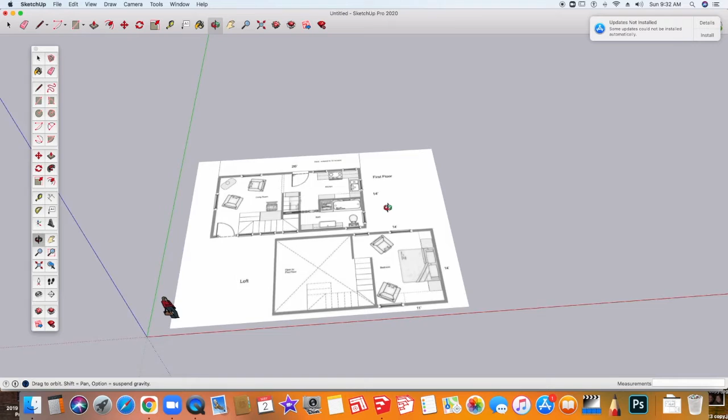Even if it doesn't match perfectly, it's okay, because when we create our volume study, which we'll be drawing our floor plan from, you'll be using the pencil tool and actually typing in the dimensions. We're going to do that first.

I can take the pencil tool and zoom in here to where this wall would extend to. Remember you want it to snap to the red or green axis. As I'm pulling it, I can click to where I think it would end, and then type in 26 feet. It looks like that is pretty correct.

Then I can come across here and type in 14 feet, and across the other side here. Remember, if you need to move something, to get the pan tool you can click down on the mouse and hold the shift key, or you can even use the H key.

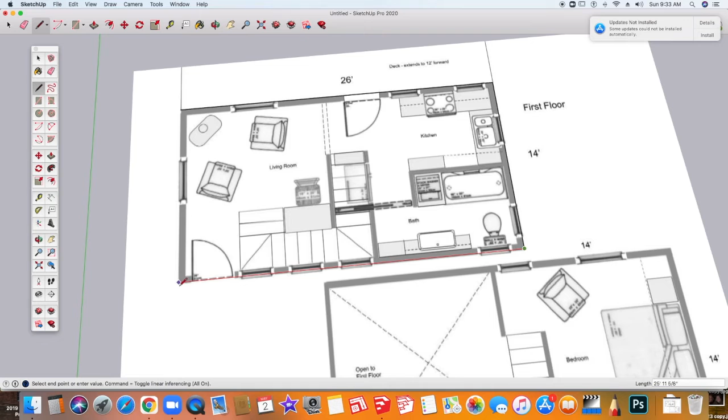Now this one I can use inferencing for, because I can mouse up to there and I should see a dotted line. I can also see down here in the lower right hand box that it says 26 feet, so I know that when I draw up to there, it will connect it. You can see there's a little bit of windows showing and whatnot, but actually this is the correct size. This is the first floor.

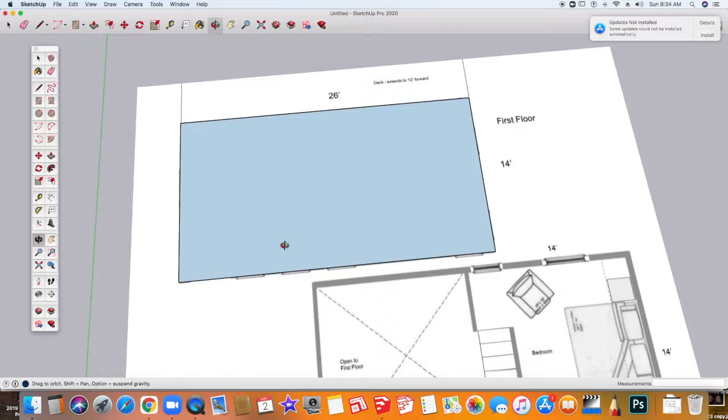When I brought the floor plan in, it was its own group. I'd like to assign this to its own layer, and here is the actual floor plan. I do want these to be separate because at some point I'm going to want to turn off this floor plan. I'm going to select the floor plan and go up to Window.

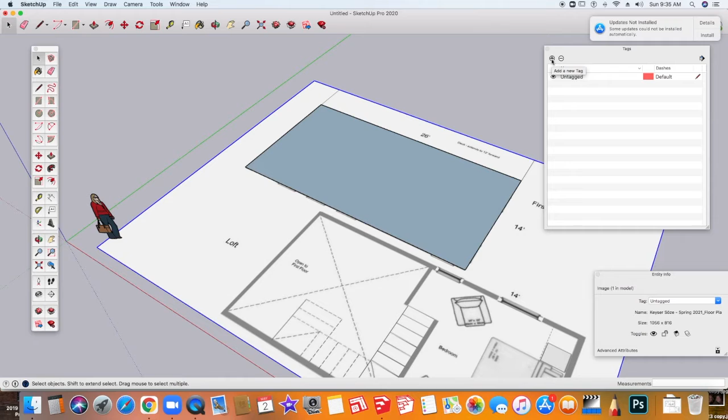I'm going to select Entity Info Box, which is right here on the lower right, and select the tags layer. In SketchUp Pro, the way you apply tags to an object is slightly different than how we did it in SketchUp for Schools. In the plus button here, just like in SketchUp for Schools, I'm going to click it and call this floor plan.

Planning ahead, I'm going to make another one for first floor. I'm going to call this volume study, just so I know it's different from when I actually create the first floor plan. Because I have a second floor, I'm going to do the same thing for the second floor volume.

You'll see that the floor plan is selected. So when I go to the entity info box, when I click on different things in SketchUp, you'll see that the entity info box is actually giving us information about what that object is.

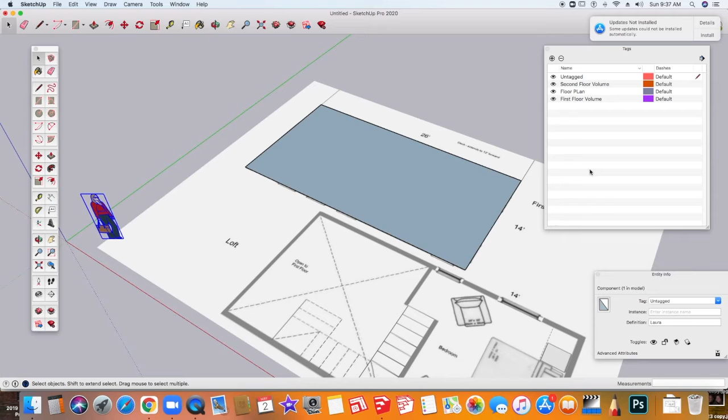When you draw anything in SketchUp and you haven't applied it to a tag, it's always going to be in the untagged tag. What we want to do is apply that object, when we select it, to a tag that we've created.

So when I select it, it's going to highlight it. You can see it actually has a name because when I imported it, it was a file, so the name of the file shows up here. Now I'm going to select floor plan. When I do that, it will automatically put it on this tag and tag it with the floor plan.

You can have multiple things on individual tags. When I turn this off, and I can turn it on—the advantage of tags is that you can turn on and off different parts of your model, and that may become important when you're working on it.

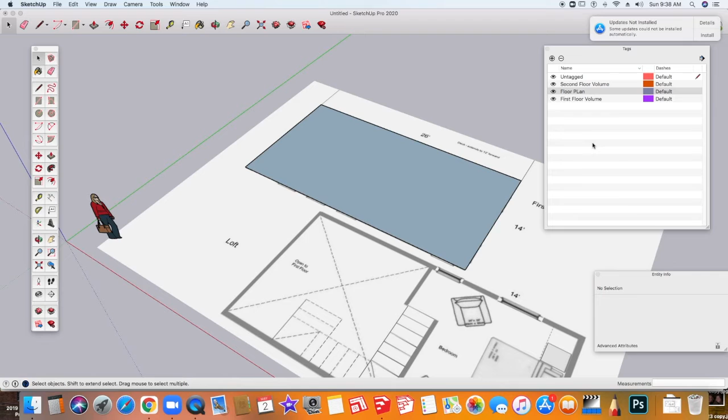Now I have this shape that I drew, and I'm going to triple click it and group this. The reason I'm grouping it now is so I don't forget, because as I draw things, remember that grouping makes it so that when you draw on top of something, it's not going to stick to it. That's really important when you're working in SketchUp. I grouped it, and now I'm going to tag it and use first floor volume study.

You'll see here, if I click the eyeball on and off, it will disappear. Right now I'm just doing volume study. And I also know that my second floor is roughly the same with the exception of what this part is going to look like.

There are a couple ways I could handle this, but I'm going to just keep the same footprint because this floor is open to the first floor. That means these outer walls will actually be at the same height, or they might be different. I haven't really determined that yet. Depends on what the roof looks like. They may be different, but for right now, I think it's going to all be the same height.

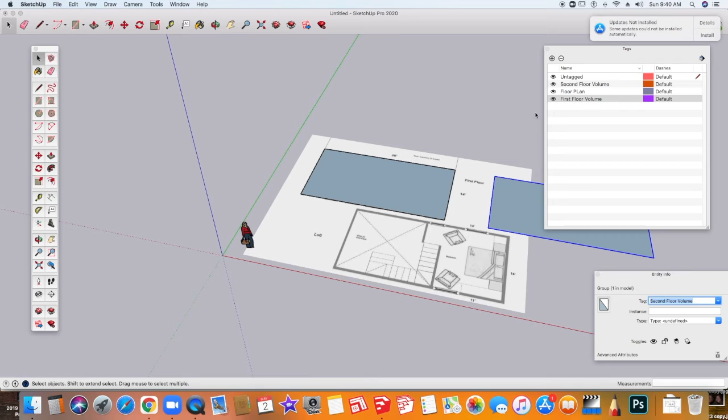So in that case, I'm going to actually make a copy of this. To do that, I'm going to select it, use the Move tool, hold the Option key down, and make a copy. Now they're both on the first floor volume study. So I need to take the one I just pulled and apply that to the second floor volume study, and let's just figure out and see if that works. Yep, it works. Now I have these two and I can move them separately.

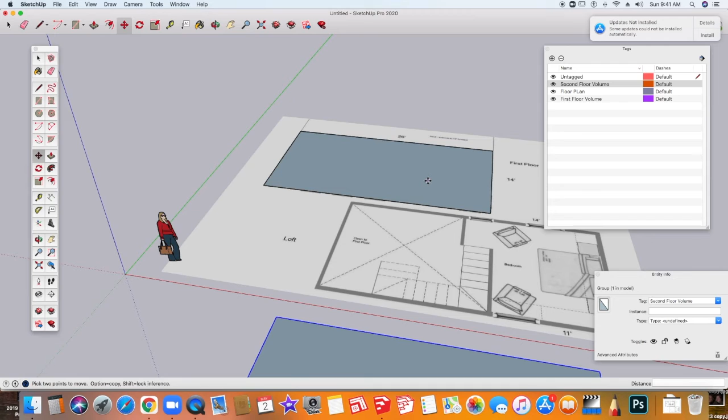So now for the volume study, our parameters are that this house is sitting on a pad that is 1 foot thick. The foundation will always come up above grade, which means the ground level. If you have a sloping property, it might come up higher, just depends on what your site is like. So for right now, we're just going to create this as a 1 foot high pad.

To do that, obviously I'm going to have to click on this. Because it's grouped, I have to do this in edit mode, so I'm going to double click and get into edit mode. I'm going to take my push-pull tool and push that up 1 foot.

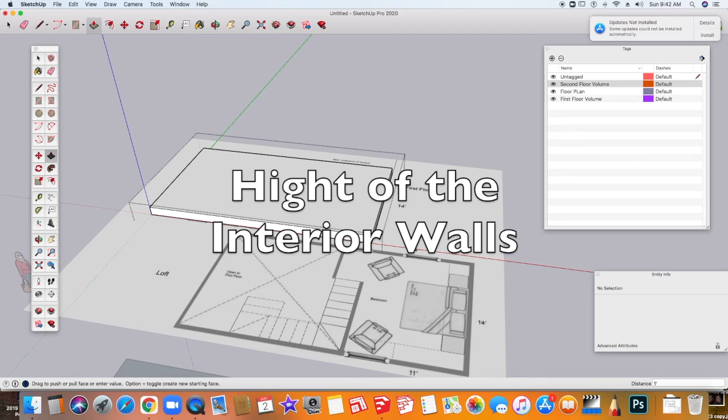Now we have to think about how high our walls are. In my case, my walls are 8 feet high. Some of you may have done 9, but I'm going to do 8. So I'm going to click again and pull this up 8 feet. Right here, this is my first floor.

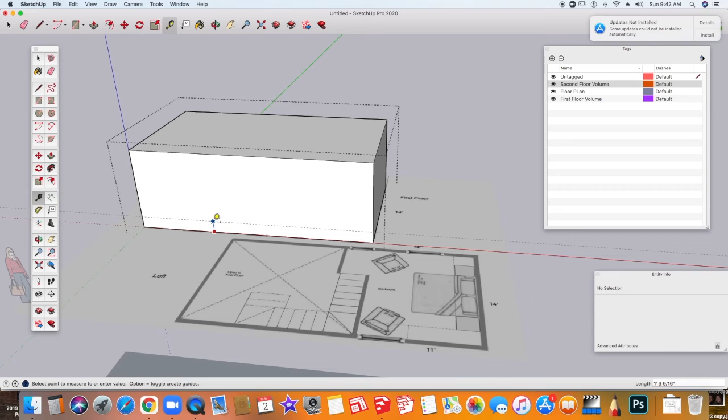I'm going to go into edit mode and pull a little guideline up 1 foot along the blue axis, just so I remember where my pad is. If you have a second floor, there will also be a 1 foot space underneath, which will account for your floor joists. These are the joists that support the second floor. So we're going to do the same thing here.

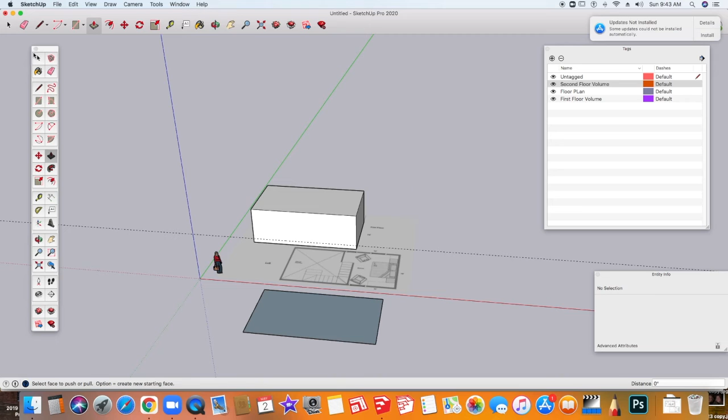I'm going to go into edit mode. Remember, if you see that you can't do anything, it's because you're not in edit mode. I'm going to pull this up 1 foot, then pull this up another 8 feet because that would be the full height. So now I've got these two pieces.

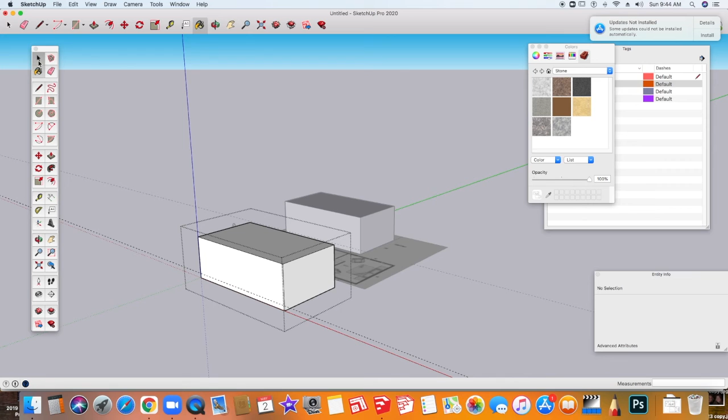I'm also going to go into edit mode here and give myself a 1 foot high notation for where that floor joist would be. I did it in edit mode so that this guideline would actually be stuck with this group. So now I'm just going to put them on top of each other.

I'm going to select it, use the Move tool. Remember that when you move with the Move tool, you always want to go from a corner to a corner. It just makes things a whole lot easier.

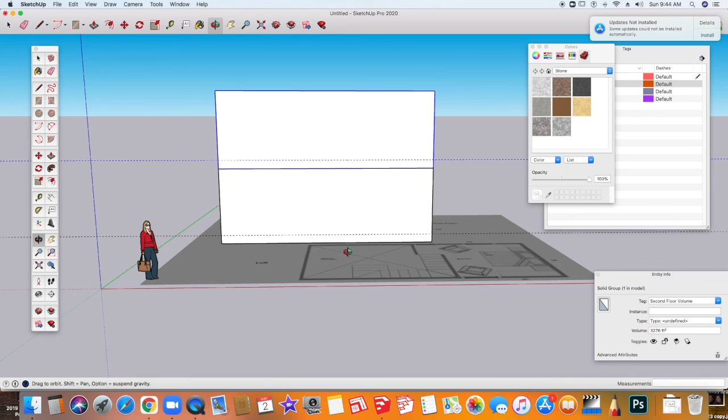So here we have our pad. Then we have our first floor with an 8 foot ceiling. Then we have our floor joists, and we're allowing 1 foot for that. And then I have another 8 feet above that. Now you can see how large this actually is in relation to the person.

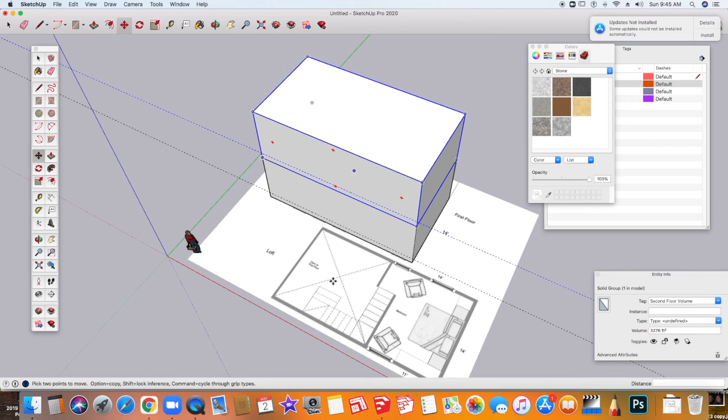Because we're going to be thinking about our roofs at the same time, I'm also going to mark where my walls will be in this volume study for the second floor. So I'm going to go into edit mode, double click that second floor volume. And I know from here to this is going to be a half wall. This is 14 feet, this is 14 feet. And then this side, because I'm accounting for this 3-foot stairwell, this will be 11 feet.

So I'm just going to put a guideline in here to remind myself of that. Guidelines are very helpful. They don't affect geometry like a line tool would affect the geometry. Guidelines are used to kind of lay out what it is you want to do.

Here, I'm going to put in 11 feet and click enter. Then I'm going to pull another guideline and type in 14 feet. If I wanted to do a sloping roof here, I would know where my wall would need to be going down from, or if I wanted to pull this up a little bit higher and make a cross roof, I could do that too, or a gabled roof.

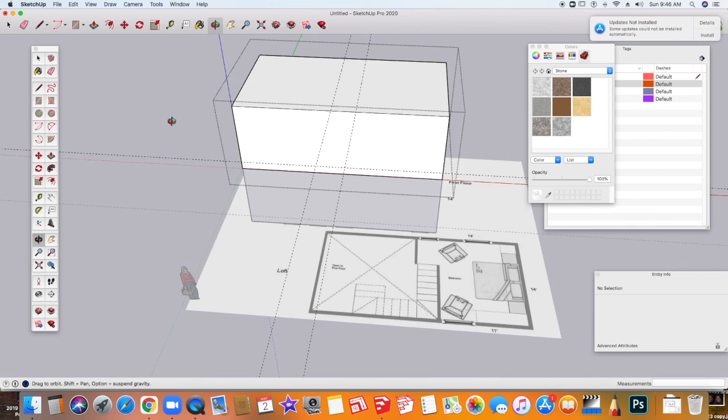So now I'm going to close that and I'll be able to come over here and turn off the second floor volume, and I can also turn off the first floor volume, and turn off the floor plan. Remember to save your work and remember where you are saving it to. I'm going to save this on my desktop.

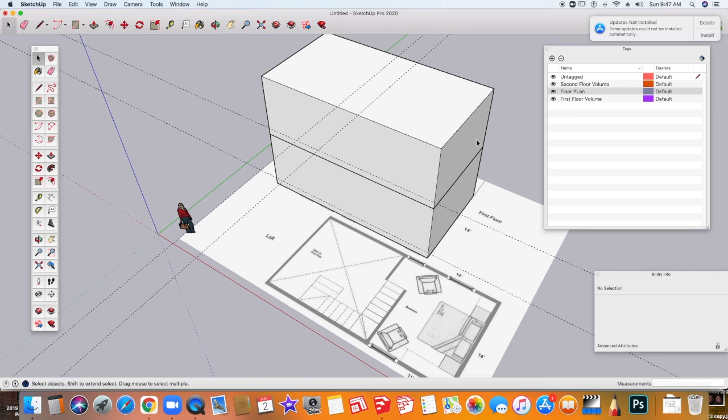This is really designed to give you a sense of how big this house is going to be in case you want to make any changes. Next, we're going to talk about doing roofs.